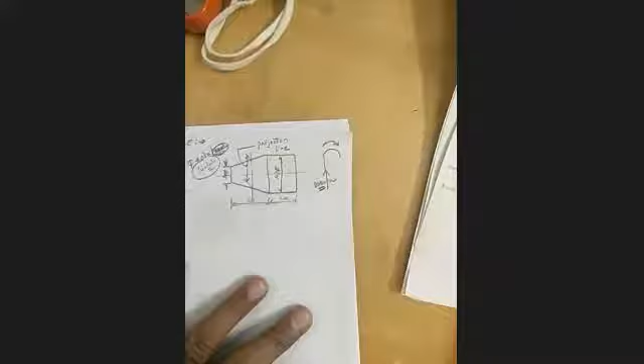Can you observe your body, how it behaves? Will the body be same or will it tilt? It will tilt, sir. Why will it tilt? My question is why you tilted your body. That is the centrifugal force, sir. Yes, tell clearly, what is that?

Okay, I will ask this. Think about this, one more thing. This is the straight path. Your vehicle is moving around 60 kilometers per hour. There is a gradient, again a straight path. Now will your vehicle retain the same speed or different?

Different, sir. Why? Because to move up the height, we will raise it. We have to add more speed.

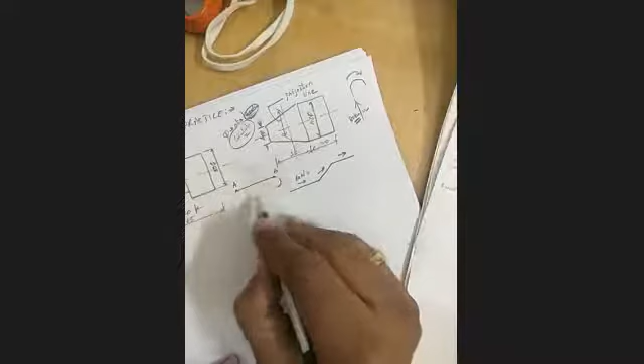One more example, I will give a simple task you can do at home. Take one distance. Start point is A, reach B in a straight path. Take a turn, come back again to A. While going up, check the time. While coming down, check the time. Both are same or different?

Different, sir. Why? Here I haven't made anything different, the path is same, there is no up and down. Yes, you turn again, come back and reach the point. Why is the time different?

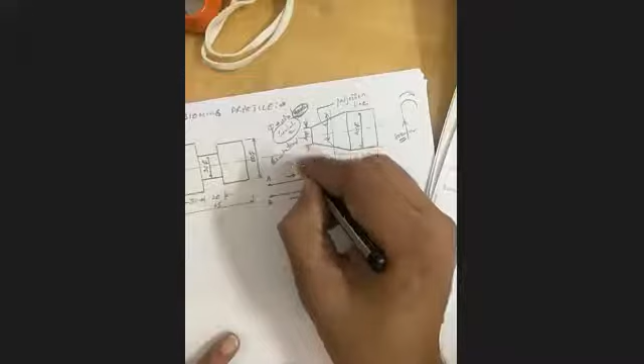Sir, while moving up, we move slow. While coming down, we move fast. Why? Who told you? Due to gravitational force, sir. Oh, what is that gravitational force? I want that word. Centrifugal force, sir. What is it, from where did it come?

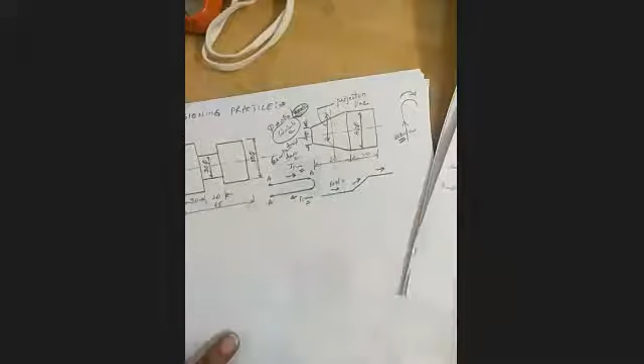I did not say anything about gravity. I did not speak about anything. I simply told you: rider is there, ride is there, maintain constant speed, start from A, reach B, take a U-turn, come back to A. I just want to check whether the time should be same. Why is it not happening?

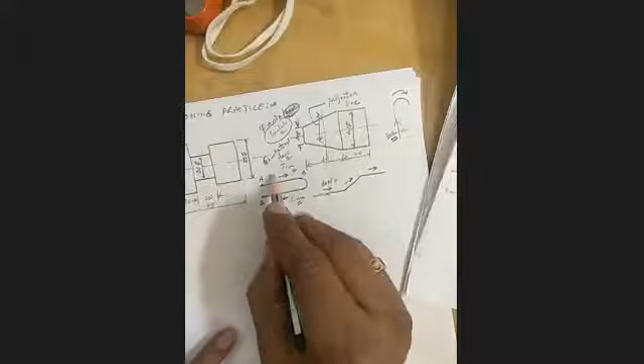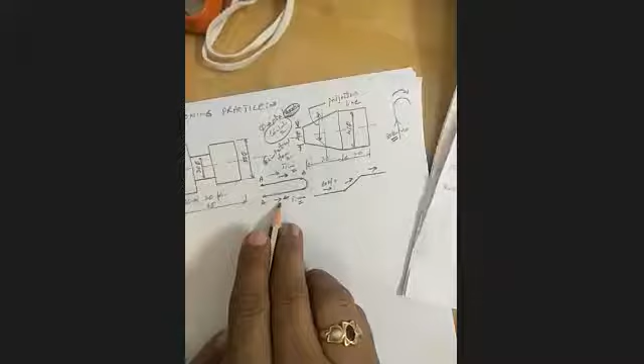Always remember that there are n number of forces acting. Can you change wind velocity? If wind is flowing in this direction, you can reach the destination as early as possible. But while going back, wind is in the opposite direction. You are moving in this direction, but now wind and your speed are in opposite directions, causing resistance. You need more energy, more time to overcome the same distance. Be careful regarding that.

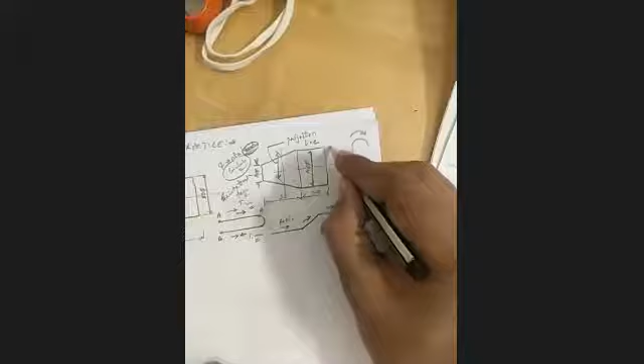Certain things in nature play a very vital role. When you are standing here, your body is in equilibrium state. But while trekking, what is the center of gravity? Have you ever heard this word, CG? Yes sir, CG will play a very important role.

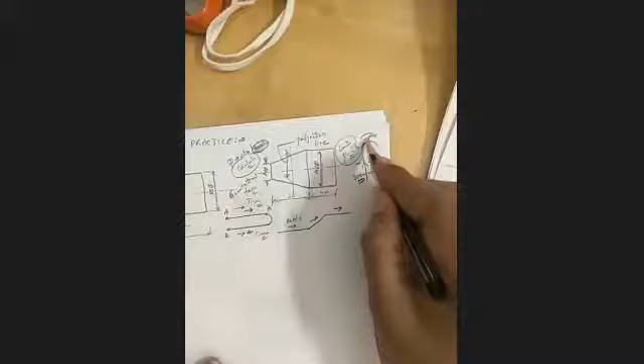Here, what will happen? Suddenly your body has to tilt because the vehicle is moving towards this direction. Your body has to tilt in the other direction. Then only you can balance the equilibrium state. What do you have to balance? Equilibrium state, then only you will get net output. Otherwise, skidding, you know what skidding is?

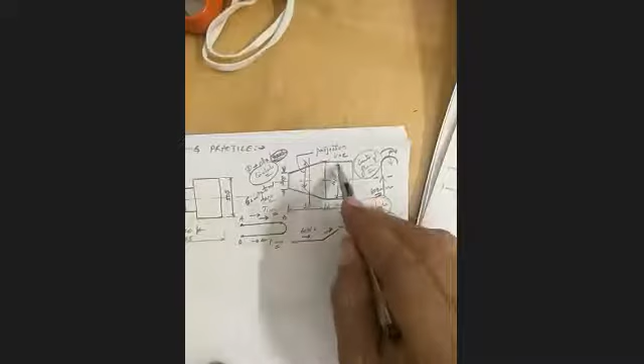Here, at every point, is the diameter same or different? Every point, here I wrote it once only. What is the relation between these two lines? Parallel, parallel means they are equidistant. What about these two lines? Are they parallel? No sir.

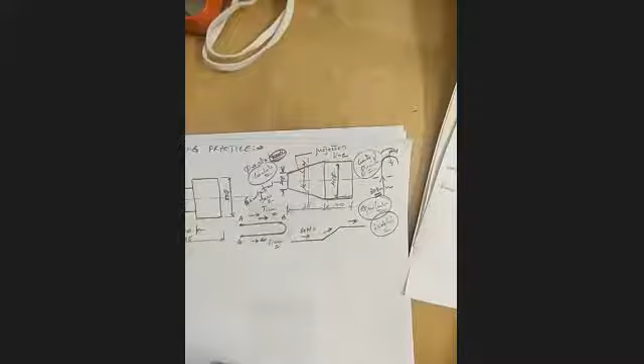No sir, so they are inclined. So whenever you want to check the diameter at a particular point, first you have to draw one vertical line, mark this point, draw one line, and this line should be parallel to that. Then draw this type of line, which is called the projection line.

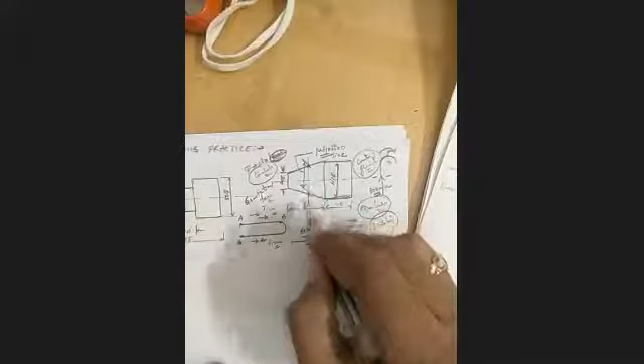Projection line indicates the diameter at one particular point. Here, at every particular point, the diameter is the same because these two are parallel. But here, the diameter is a variable, so at one particular point, if you want to check the projection, that line is called the projection line.

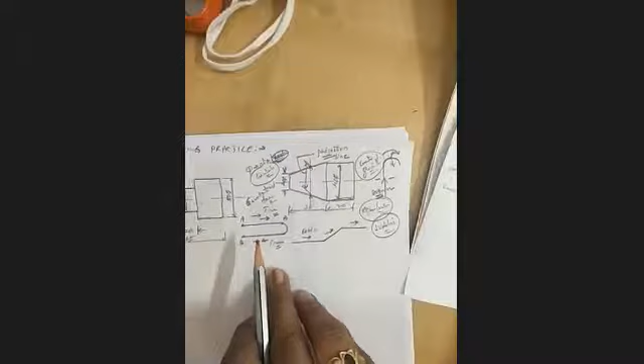Any doubts? No sir. Now I have drawn arrow marks. You should not draw arrow marks as per your wish. Now I will tell you, because in engineering drawing, everything should be universally accepted.

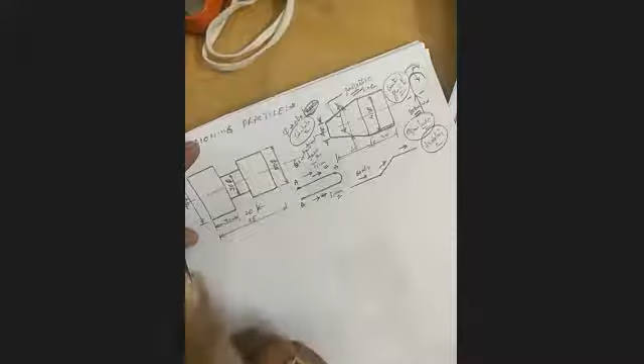Everything should be universal. First, draw this line. This is one way. Draw this line, this. Second.

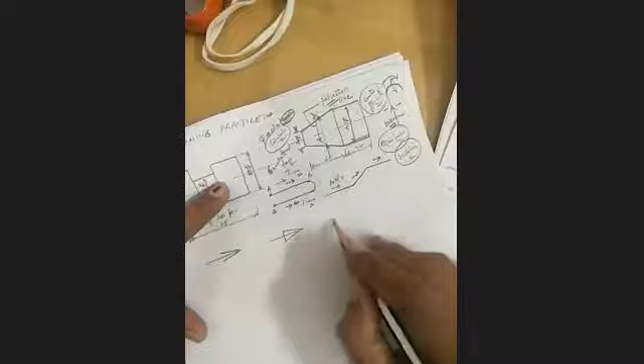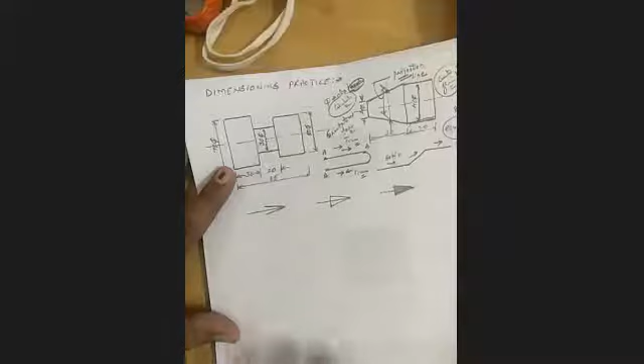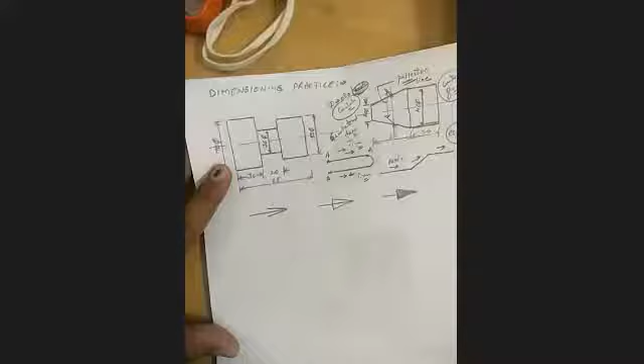There are three different ways, can you name them? Why is your name Bhavya? Why didn't you ask your mom and dad why they kept your name as Bhavya? I'm just asking a general question - who kept those names? Parents. Why did they keep that particular name, why not something else? There are a number of reasons - it should have a specific meaning related to your time, birth place, or ancestors. We have a casual attitude about this. In engineering, remember, if you go in detail you will get a number of problems as well as solutions. When I asked Bhavya, she was surprised - why is Kulkarni sir asking me this? Nothing, you have to feel proud of your name. It is what your parents liked, they felt something good in it. Always be proud, don't feel egoistic.

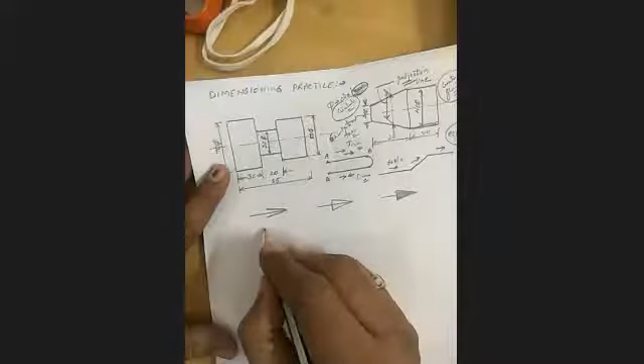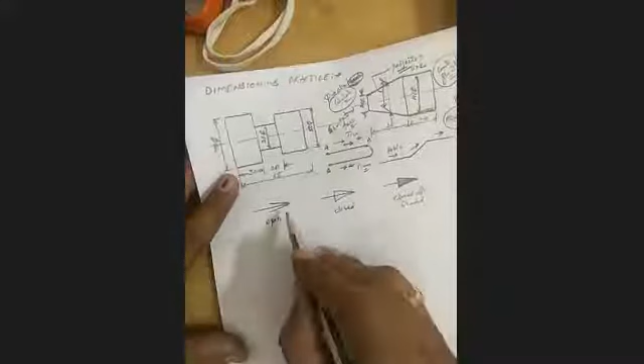Now tell me, can you name these? Open arrow, closed arrow, closed with shaded arrow. All are arrows. See, very simple - if you dare, you can do anything. You can use open arrow, closed arrow, or closed with shaded arrow. It is left to you people, you have to decide, I won't say anything. But stick to one policy throughout the drawing sheet. I always prefer open arrow.

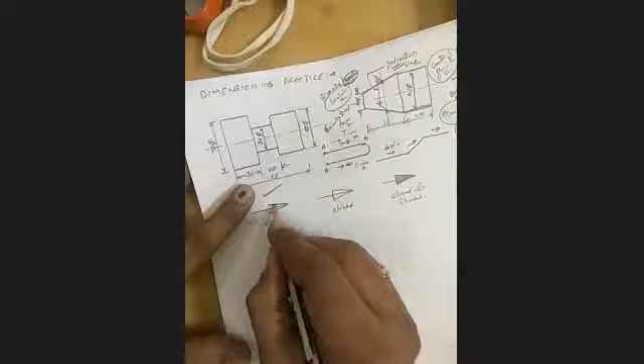Now, how many students know what this internal angle is? That internal angle is 45, how much, 30, 15? How much did I write - 15 degrees, 7.5 up, 7.5. This is for knowledge, I am telling you. While drawing this I did not measure any angle.

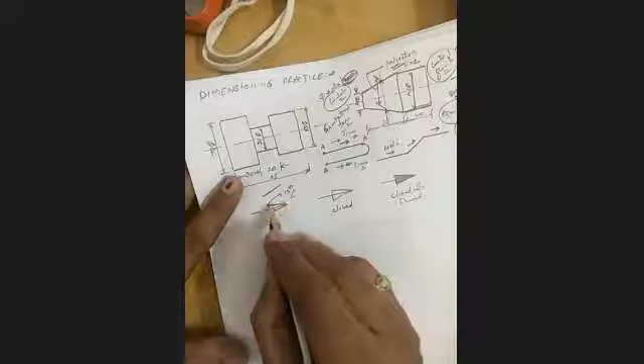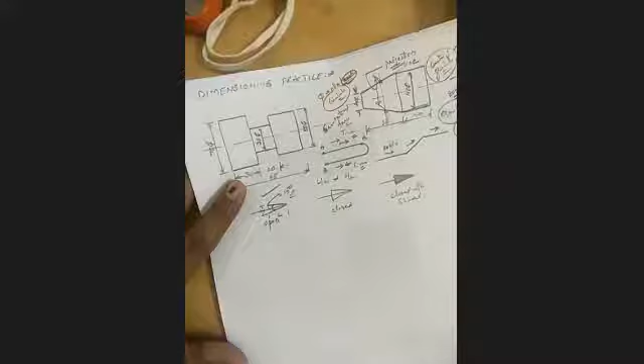Simply I drew it. See, this is length, this is width - be careful of this. Length and width ratio - that length is always 3:2, meaning the ratio is 3:2. Width is once lesser than length, or lesser than width it may be 1:3. If you take length 3, width should be 1, so that ratio you have to follow. If somebody asks what is the ratio of length to width, it may be 2:3 or 3:2, 1:3 or 3:1. That is the method you have to follow. Getting my point? But I always prefer this. Any doubts?

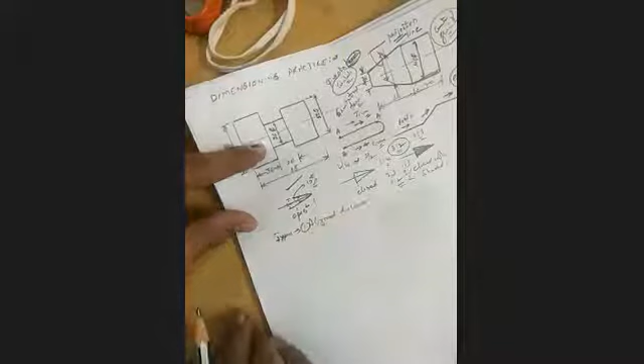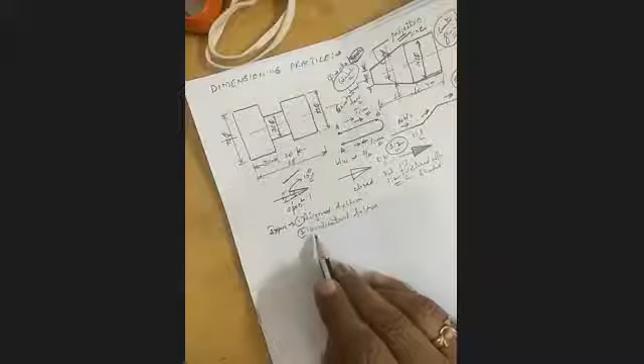Now there are two types of dimensioning system. Under this banner there are two types. The first one is called aligned system, and the second one is called unidirectional system. Any doubts?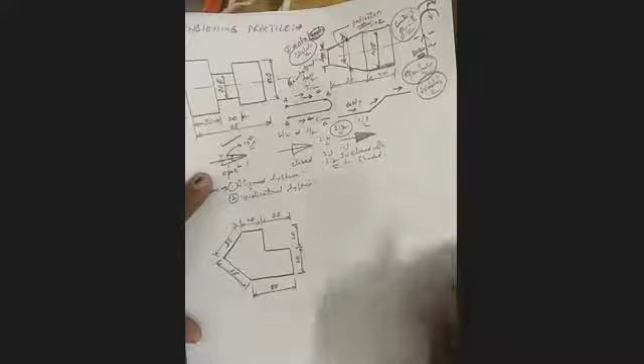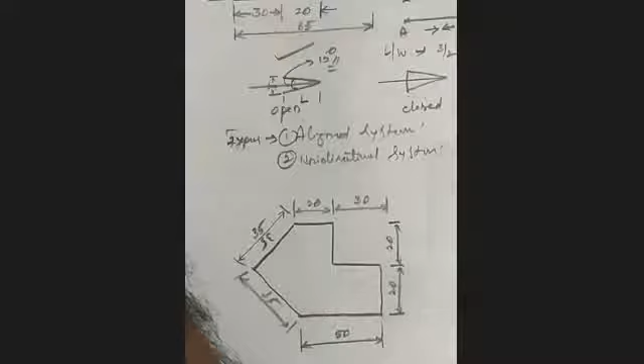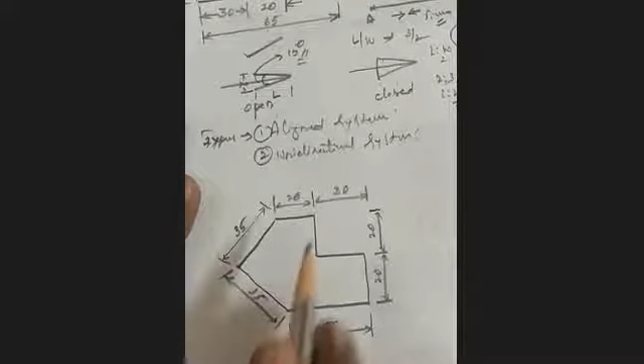Drawing. Sir, once read out the measurements. This is 20mm, 20, 30, 20, 20, 50, 35, 35. Right side 20, 20, 20, 20, 20. Okay sir, but it is not circular, be careful.

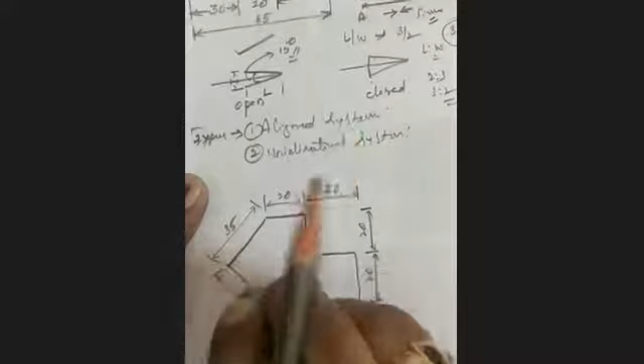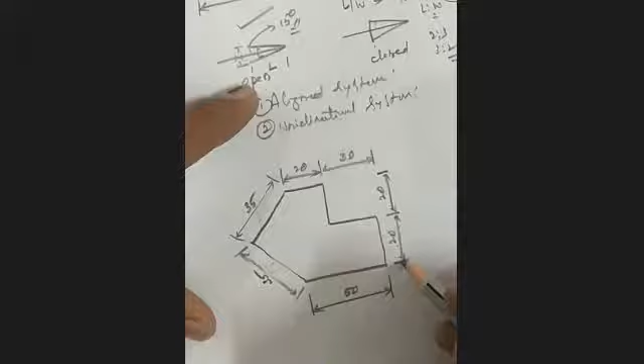Now listen, what is aligned? Aligned system is very simple - aligned means you have to draw the full line, two arrows, near the center, and write the dimension there. Full line, 2 arrows, center dimension. Full line, center dimension, full line, 2 arrows, center dimension, full at the top. Finish - this is the aligned system.

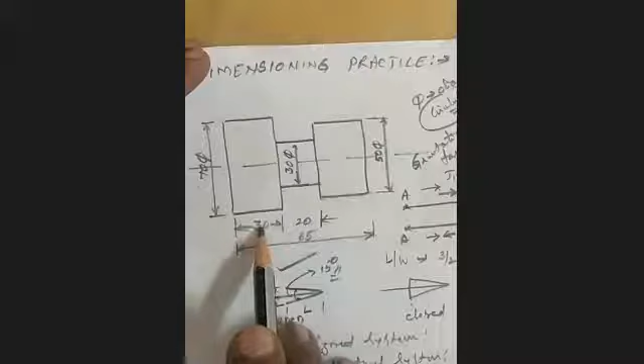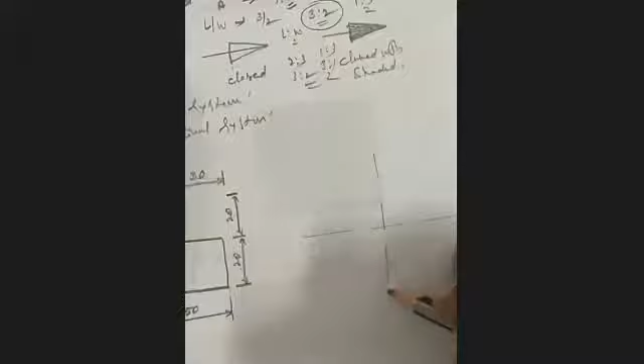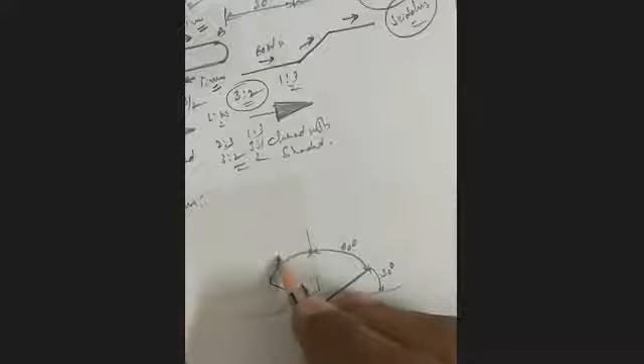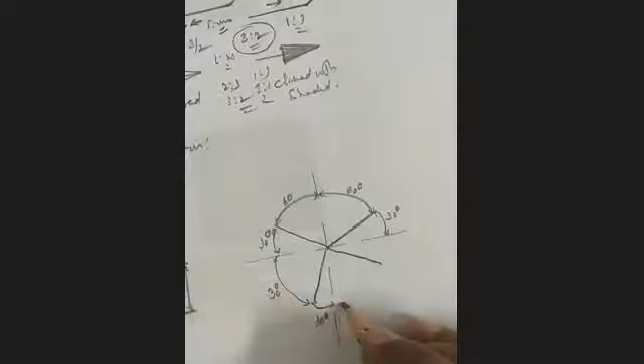I draw the axis lines. This is 30 degree, this is 30 degree. From here, this is 30 degree, you see. This is obviously how much? 60, 60. This is 30 degree. Degree is really compulsory, angular dimension is always in degree. This is 60 degree and this is 30 degree. Finished. Full dimension centrally is 60.

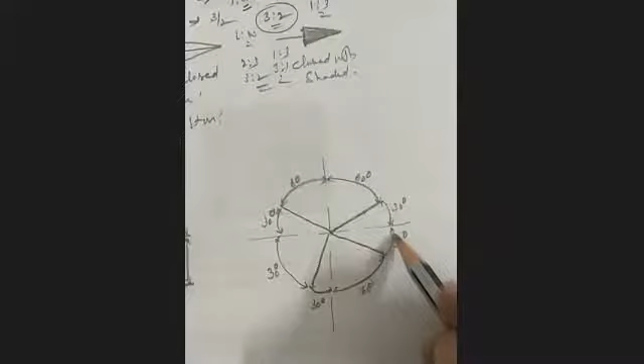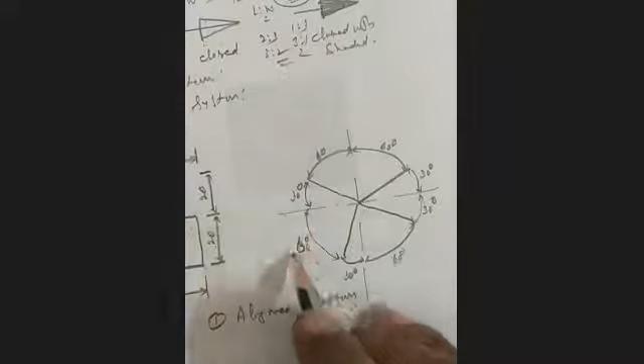This method is called aligned system. I wrote 30 and 60. This is 60, while writing I forgot. Total is 90, 30 plus 60. This is the bigger one, obviously it is 60. This is linear dimension, this is angular dimension. Both I represented. Only 4 lines I drew, but I represented them angularly.

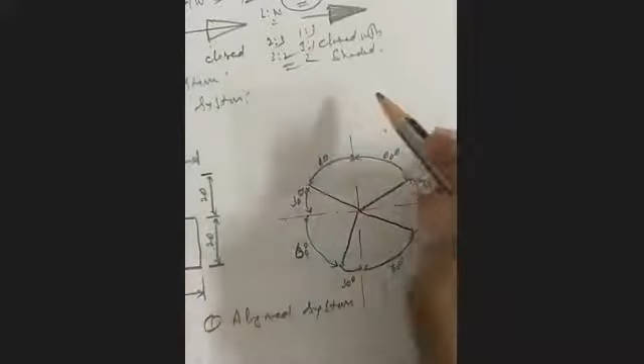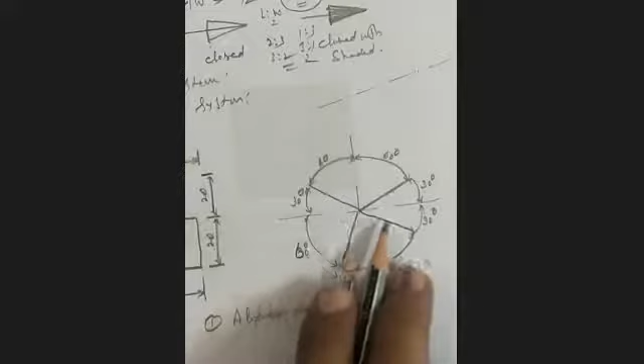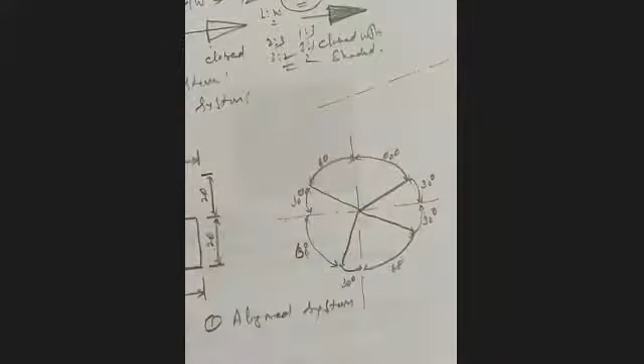Sir, in this diagram, every dash has a dot after it, along the line. That is the axis line, a thin line, it is only for your reference, it should not be dark. That's why using HB and 2H, I will tell you in one of the classes when to use 2H and where all other lines should be HB.

Both figures are over. Completed, now I will do here only. I won't draw a new figure, I will erase this and write unidirectional. You may feel, sir, what is the difference? I will convert it. Same figure you have to redraw once more, but because I don't want to draw it again, I am doing it in the same figure.

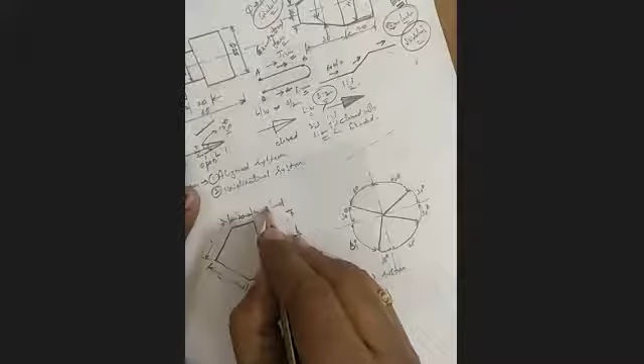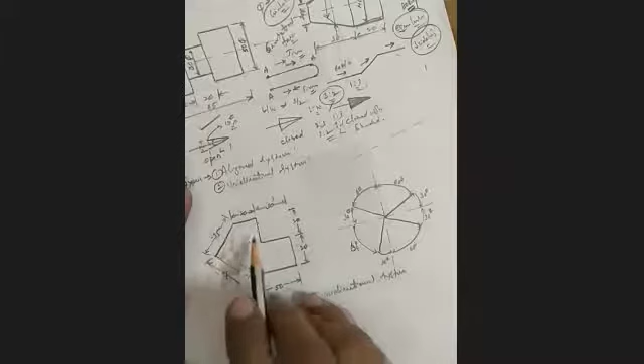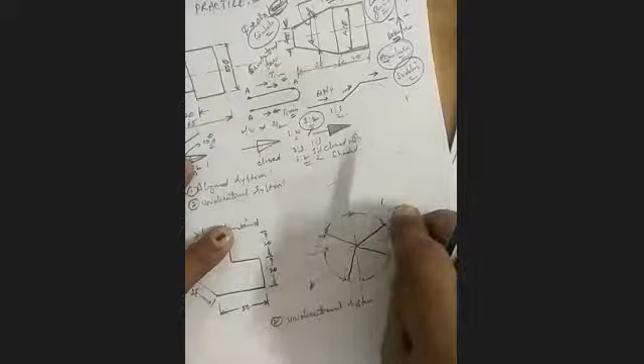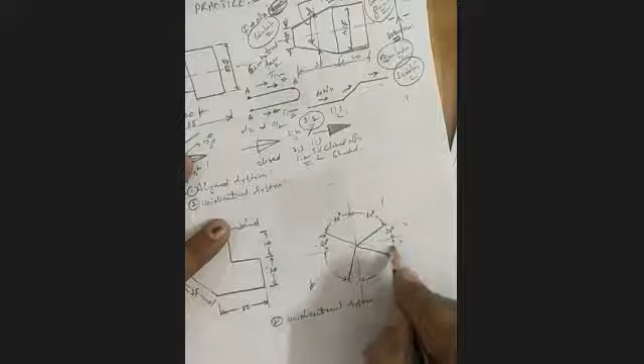See what I did. Nothing, amma, this is 20, 30, 20, 20, 50, 35. This is 35. Unidirectional means complete line, then a small space at the center, and we cut that line in a single direction. This is called unidirectional. The earlier figure is bidirectional, with 2 directions, but now this is an independent line with space drawn. Same thing you do here. That's why I told you I will minimize my work, I will simply erase and center it. This is called unidirectional. 30 degree at center you have to write: 60 degree, 30 degree, 30 degree, 60 degree, 30 degree. This is 60. This is unidirectional.

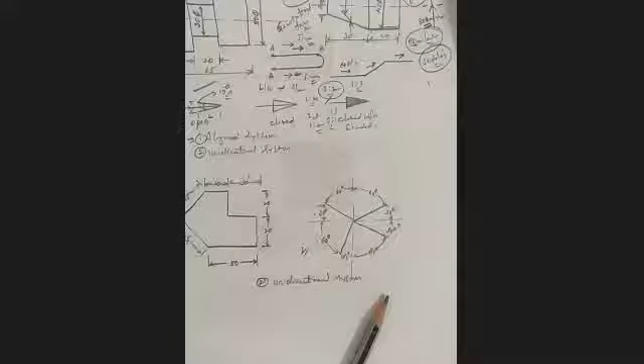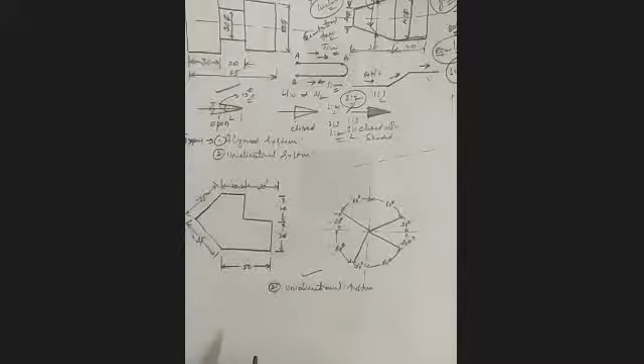That is the basic difference between that and this. This is important, amma, dimensions are very much important. Without dimensions, we engineers won't understand the size of the component. But for dimensioning, you may follow either system. I always follow the unidirectional system and give open arrows. I am giving you an open option, you may follow the aligned system or unidirectional, that is left to you, but I always follow unidirectional with open arrow.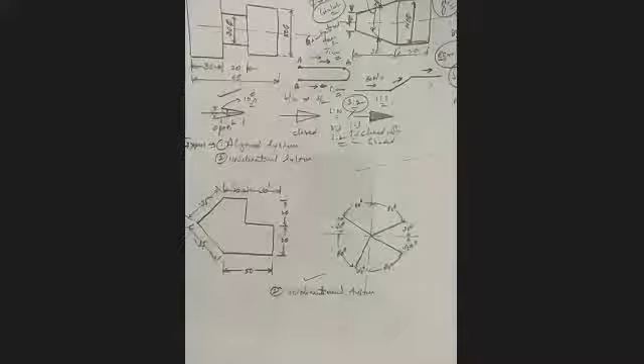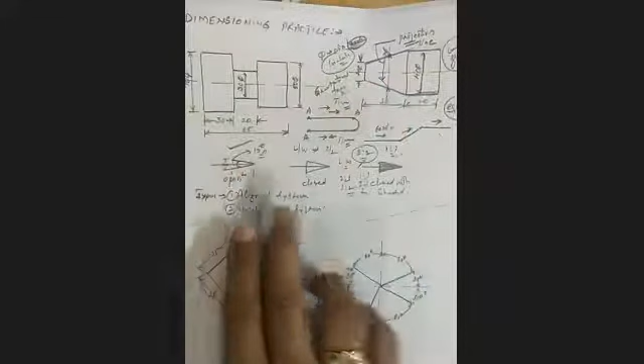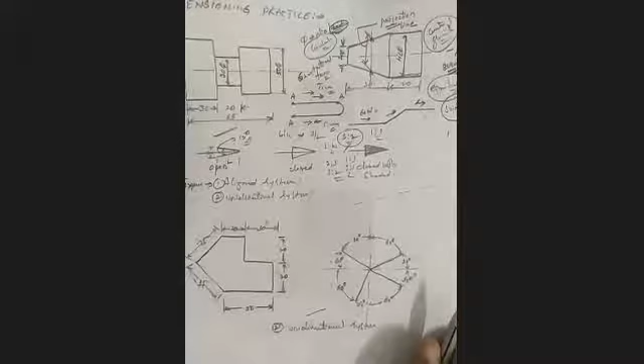Got it? Note it down, but don't erase like me. I did it only to minimize my burden, that's why I asked you to note down first, otherwise you will have to redraw all figures again. In the drawing sheet, I want different types of lines: that box, this figure, these three arrows, this figure with aligned system, and centrally you have to write again two figures with unidirectional system. This sheet still has so many contents that I will cover in the next class.

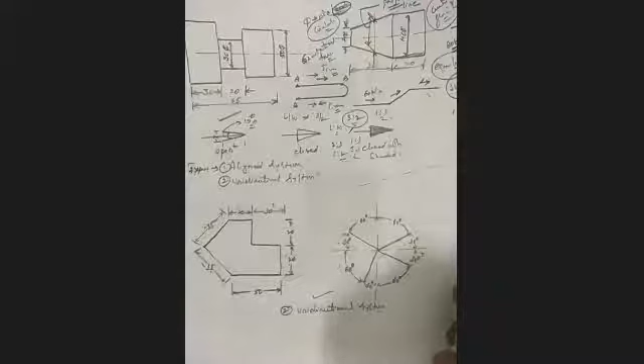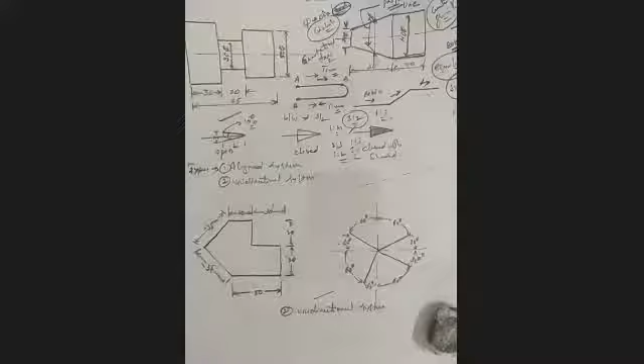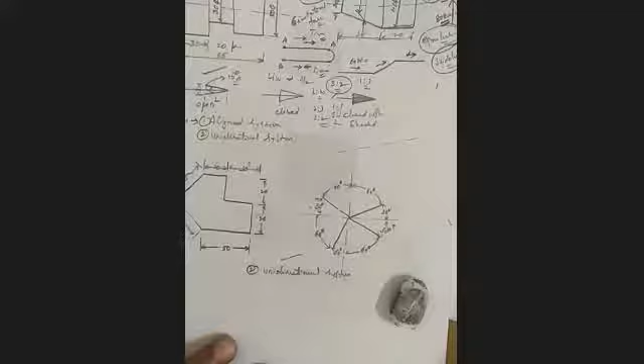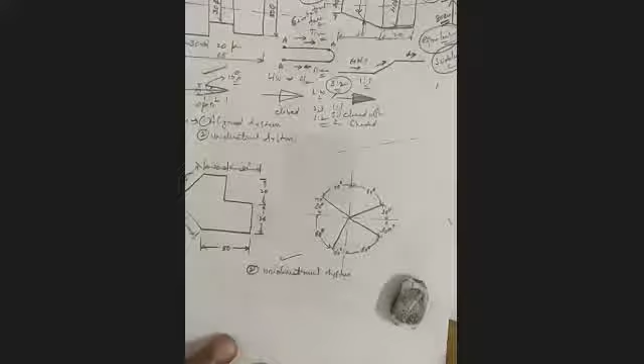Please show your notebook. Ashwath, show your notebook, keep your video open. Ashwath is present... he left. Okay, now I will take attendance. Very good, Satwik, Manish, 4B2, show your notebook, turn on your video. Sir, I am traveling, I will show in the next lab. Okay, I will check then. Next, Arvind, 4B3. People are leaving, show your notebook. Show me, good, right, he is showing, thank you. Next, Pragati.

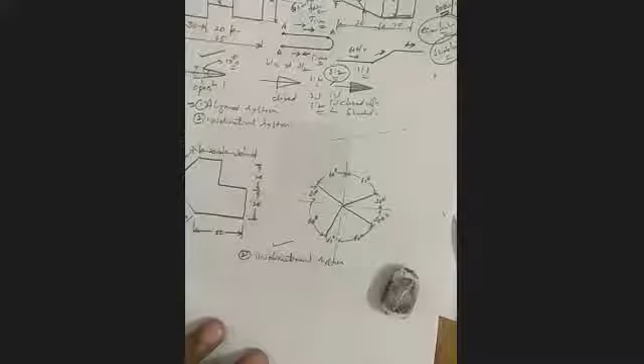Yes sir, showing, Pragati please show. Please switch on your video. What happened, Pragati? Sir I switched it on. Now it is visible, next, good, but keep it in one notebook only. This also we should write in observation only, yes sir, only observation everything, after that only figures you have to transfer, theory part should be in observation. Okay sir. Bhanusri, 4B6, she is present, show your notebook, very good, nicely maintained.